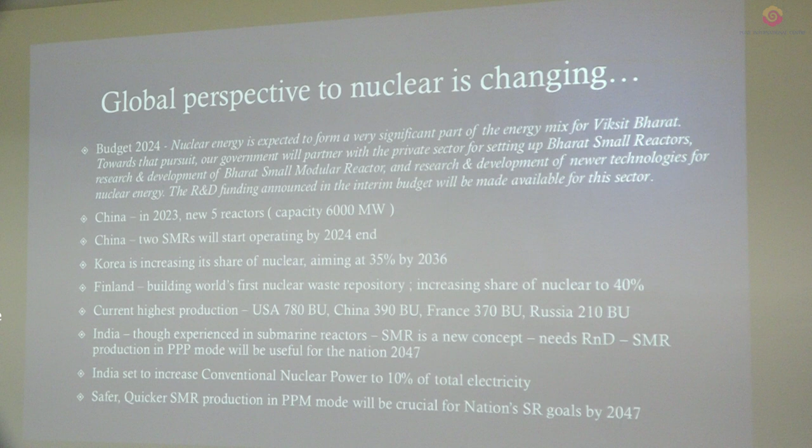We are set to increase our conventional nuclear power to about 10%. Today we are still only at about 3%, and that is the ongoing governmental program. But besides that, even that will not suffice to bridge the gap — and that is already committed.

Therefore, safer, quicker SMR production in PPP mode will be critical. Why PPP mode? Because now government has opened up and industry participation is welcome. That is the main game changer, and we are looking at the possibilities.

These are my initial remarks to make a case that we are trying to do this roundtable because we are a think tank who influence policies. So we want to go ahead of what's happening, if possible.

In fact, we are pleasantly surprised that many things are already happening. Hindu Business Line has reported that the government is already thinking of how to modify the nuclear regulatory regime laws to allow private players to come in with more enthusiasm, and how SMRs will change the picture.

So it is in this context that we are discussing here today, probably for the first time in Pune, at least in Maharashtra. I tried to get as many experts, as many well-known and well-informed people as possible. So we will commence the discussion with a few words from the chairman.

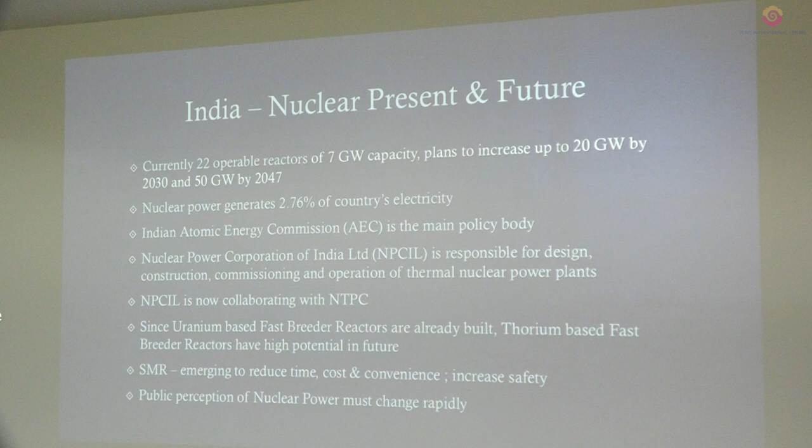India has almost achieved its three-stage nuclear program. The fast breeder reactors in the second stage are under testing. A few months ago, the Prime Minister himself started the operation of the uranium-fueled prototype fast breeder reactor. With fast breeder reactors, we have achieved closed-loop nuclear cycles, which ensure minimal radioactive waste is generated and most of the radioactive fuel is reused in the same loop.

People are always taken aback when they hear the word nuclear. All they imagine when they hear the word nuclear is the atomic bombs of Hiroshima, Nagasaki, and the nuclear disasters of Chernobyl and Fukushima. People are even wary of the word radiation. Now let's closely examine all these things.

Radiation from a nuclear power plant is ionizing radiation, which is harmful for the body because it has gamma radiation. What people don't know is that most of the ionizing radiation exists naturally. Atmospheric radiation, radiation from buildings, medical processes like CT scans expose us to equally harmful radiation. In fact, you won't believe it, but a flight from India to USA exposes us to more radiation than entering the nuclear power plant itself.

Now, talking about the nuclear disasters, Chernobyl was the worst nuclear disaster till date. One reactor blew up, a 30-kilometer exclusion zone was created, and more than 3 lakh people were evacuated. In 2005, that is 20 years after the accident, a United Nations committee of more than 100 scientists and representatives from IAEA, WHO, UNDP, FAO, UNEP was formed to study the impacts and deaths due to the Chernobyl disaster over a period of 20 years.

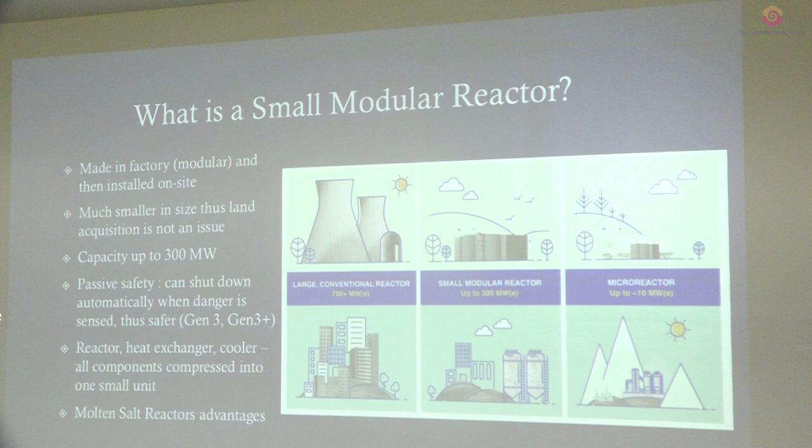So in case of an emergency, there is no force or push to drive the radioactive fuel out of the container. So there is no possibility of leakage or meltdown of the fuel. Such types of advanced nuclear reactors like SMRs and molten salt reactors are inherently safer.

Now coming back to SMRs, all the 80 SMRs are registered with the International Atomic Energy Agency, and the agency itself has published all the data, the designs, fuels, company manufacturing it, country owning it, capacity and everything in 2022 itself. Talking about the advantages and potentials of SMR, due to their small size, they're ideal for remote and difficult to access villages. They're ideal to deploy there. In the Himalayas and in remote military operations, they can produce electricity.

We all know that data is the currency of the future, and all these data processing centers will require huge amounts of energy. So SMRs are best suited for industries which require high amounts of energy. Nuclear power has the highest PLF, more than 80%. SMRs can also be installed more quickly than traditional nuclear power reactors.

One of the peculiar features is that no large cooling towers are required. No large quantity of water is required for cooling. SMRs can also be made in standardized designs so that it is cheaper to produce them at mass scale. An advantage of nuclear energy is that it requires the lowest material, beginning from the construction of the power plant, including the cement, concrete, glass, and the fuel, everything. And also, nuclear energy has the lowest greenhouse gas emissions per gigawatt hour of electricity produced.

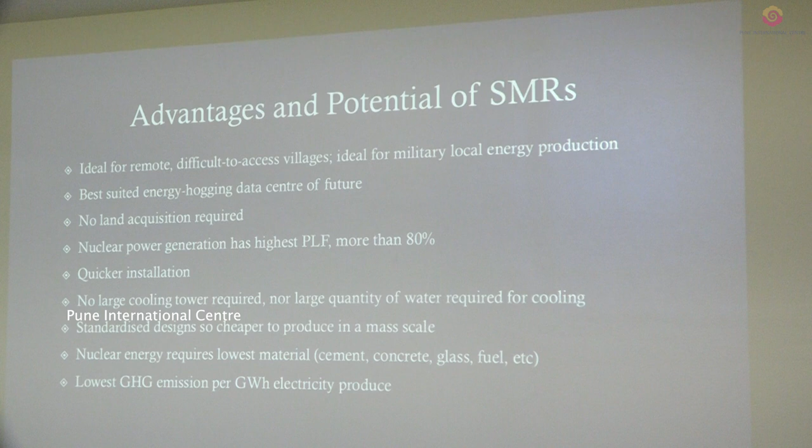NPCIL and IIM Ahmedabad prepared a report in April 2024, titled Synchronizing Energy Transitions Toward Possible Net Zero India, Affordable and Clean Energy for All. This report was published by the Office of the Principal Scientific Advisor to the Government of India, and the report studies different scenarios of energy mix that can provide affordable and clean energy for all citizens living in developed India. By developed India, they're assuming a human development index of 0.9. Our current human development index is 0.64.

For a future population of 1.5 billion, energy requirements would be a minimum of 20,000 terawatt hours for 0.9 HDI and a minimum of 14,000 terawatt hours for 0.8 HDI. So the report basically focuses on the energy mix, which includes newer technologies like low carbon hydrogen from fossil hydrocarbons with carbon capture, direct splitting of water to get green hydrogen, advanced photovoltaics, and advanced nuclear technologies such as SMR.

The most interesting finding from this report is that among all the net zero scenarios, the one which has 330 gigawatts of nuclear energy deployed has the lowest LCOE, that is levelized cost of electricity for the consumers, and its greenhouse gas emissions are the least. As sir already mentioned, Russia has gone live with SMR. Russia has a floating SMR near the Arctic which provides 70 megawatts of electricity to a remote village in the Arctic. China has also gone live with SMR. They have the world's first commercial SMR in the Linglong One.

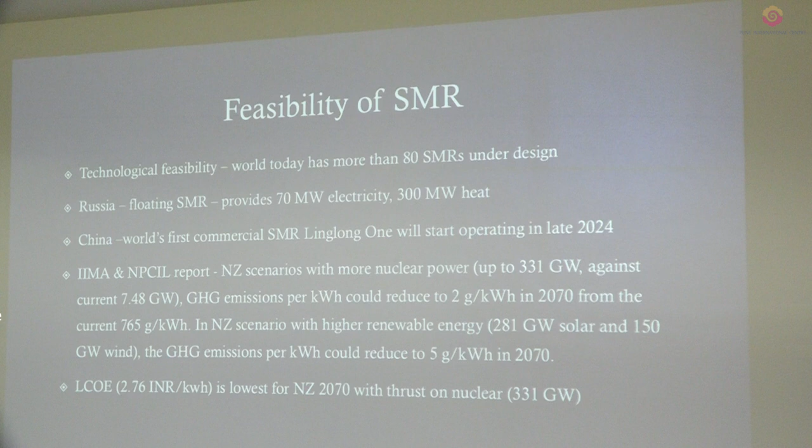The major advantage of SMR is that it need not be situated near coastal regions because it does not require a large amount of water. With SMR, we can go into distributed generation of electricity. SMRs can be deployed in different locations like remote villages in the Himalayas and military bases, and they will not only produce their own electricity, but will also reduce the dependency of such remote locations on large and centralized power plants. This increases energy self-reliance in smaller pockets and improves resilience against grid failures or natural disasters.

SMRs can be placed close to high energy demand centers like industries and hospitals. This way, we can reduce the need for long distance energy transmission, which in turn will reduce energy losses and improve overall efficiency. SMR can also provide high temperature process heat for industries like cement manufacturing, steel production, and petroleum refining. They can even power remote mining operations, especially in regions where extending the power grid is not feasible. We can reduce the need for diesel generators and hence cut down carbon emissions.

If we make SMRs or even smaller micro modular reactors portable, we can deploy them in disaster struck areas to provide emergency power so that critical infrastructure like hospitals and communication networks remain operational. Portable reactors can also be used for EV charging. By decentralizing nuclear power generation, countries can reduce their reliance on a few large power plants, and decentralization increases national energy security.

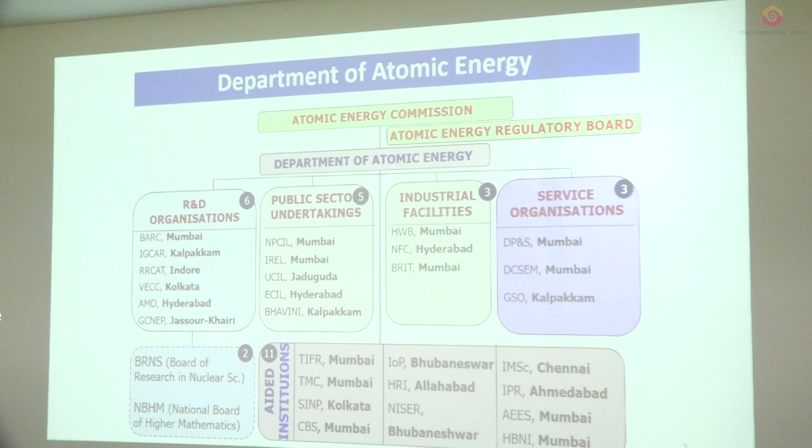There was a move to set up what is known as NSRA, Nuclear Safety Regulatory Authority, and it will play a very important role in AERB when we talk about the Bharat Small Reactors or the Bharat Small Modular Reactors, because licensing of these reactors will have to be done by AERB. Next one. This is basically the vision of the department and of NPCIL. Here you can see we talk about Department of Atomic Energy, NPCIL, which is the Nuclear Power Corporation of India. Bhavini is the one which is developing the prototype fast breeder reactor. I will touch upon that in the slide when I talk about the 3-stage nuclear power program. Then we also have Ashwini, which was set up in 23, and these are the joint ventures.

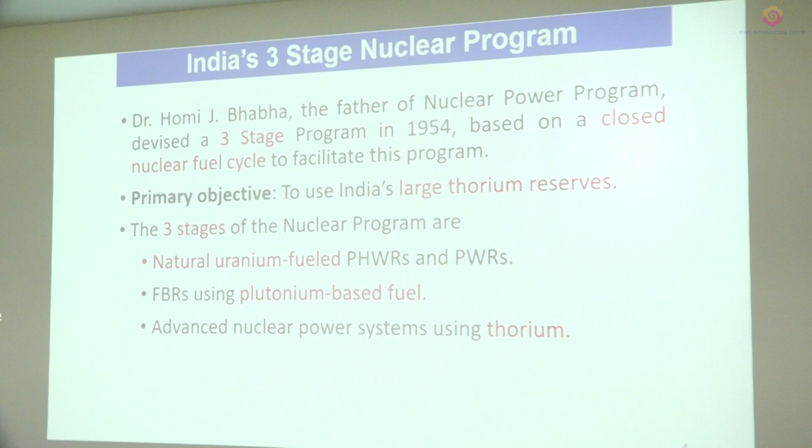Next one, please. So now this is our very famous India's 3-stage nuclear program, which was envisaged by Dr. Homi Bhabha, and the primary objective is to use India's large thorium reserves. See, India has a very peculiar situation that our natural uranium reserves are very, very low, but our thorium reserves, as Sayukta just mentioned, they are, I think, third largest in the world. So keeping in mind the need to utilize thorium for our energy production, Dr. Homi Bhabha planned a 3-stage nuclear program, which you will see in the next slide.

See now, basically what it does, you see the blue part, that is the first stage. This talks about the pressurized heavy water reactors. Basically, these are the type of reactors which use natural uranium. What you saw in the very first slide, both the reactors, Rajasthan Unit 1 and 2 and Rajasthan Unit 3 and 4. Natural uranium, it does not need any enrichment. What it needs is heavy water. So, in this, we use uranium, we use heavy water, and after irradiation, part of the uranium 238 gets converted into plutonium. Now this plutonium 239 itself is fissile. Now this is used as a driver fuel in the second stage, which you see in the middle.

Sayukta just mentioned about our Prime Minister visiting Kalpakkam facility somewhere in January. So I'll just explain what he had done and what subsequently has happened. See now, prototype fast breeder reactor, which is a 500 megawatt reactor, it has a core and the pumps and the heat exchangers within the vessel, and the vessel is submerged in liquid sodium. This is a very difficult technology. Now in January, what Prime Minister had done was the loading of the pressure vessel, not of the fuel. The fuel loading has started only very recently.

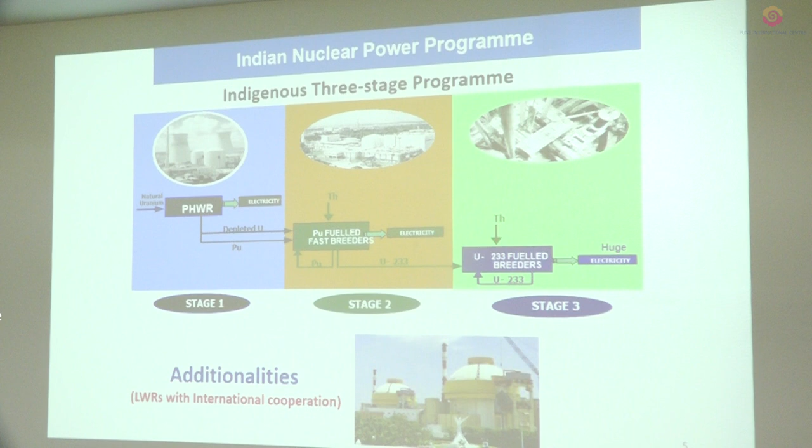The fuel is a mixed oxide of plutonium and uranium oxide, plutonium to the extent of 21% and 28%, and this fuel loading will take about a month. Why? Because these fuel assemblies are very heavy. They have to be loaded inside a pool which is submerged in liquid sodium. This is remotely done, and I believe, if I remember correctly, 192 sub-assemblies have to be loaded.

And in this particular case, we have what is known as the breeder material. Here in the first PFBR, the breeder is depleted uranium. Now this depleted uranium will turn into plutonium.

So sorry, so what about thorium? See, today we are not putting thorium in this reactor. To begin with, we are putting depleted uranium to generate more plutonium. We call it a fast breeder, a prototype fast breeder reactor. So what we are breeding, we are breeding plutonium from uranium.

But in the subsequent PFBRs, we will replace this blanket, which is depleted uranium dioxide, with thoria, that is thorium oxide. That thorium oxide will convert into uranium-233. This uranium-233 is again fissile, and it will then go into the third stage.

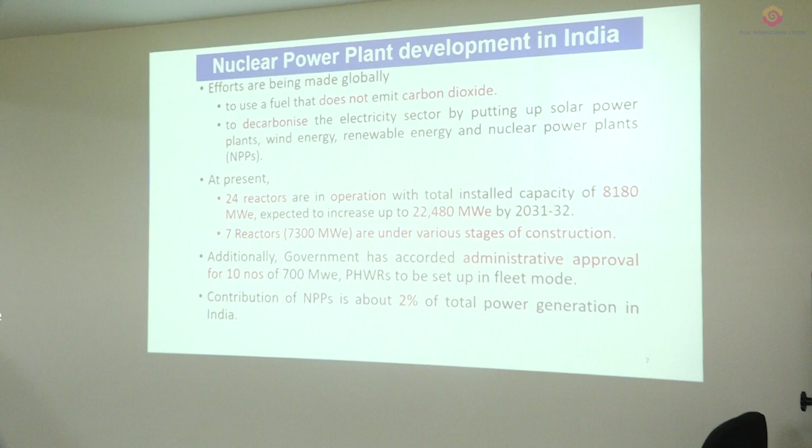Come to think about solar. If we have a monsoon or you have a cloud cover, or in European countries, when the sun is not shining for a good part of the day, you don't generate electricity, and definitely you don't generate electricity at night. So at those times at night, there is a demand, but there is no supply. So this is where nuclear comes in, because it has a very steady base load factor.

In fact, there is a very interesting case about Germany. Germany decided that it will close down all its nuclear power plants, and slowly it did that, and then it thought that it will depend on wind and solar. Over a period of time, they found that during the off-load, like at night, and when the wind is not blowing, they needed electricity. Now they had to import this electricity from France, which is generated by nuclear.

So much so that though they are not thinking about restarting nuclear, the price of electricity has gone up because they could not manage the base load factors. So this was a curious case of two cases, in fact. One is Germany and another one is Japan. Japan, unfortunately, after the Fukushima incident, shut down roughly about 52 reactors, all the 52 reactors, because naturally there was a lot of protest.

But then you see the requirement of Japan is met only by petroleum. If you sometimes watch satellite images, or even if you travel by air, as you approach Tokyo you can see the oil tankers. So basically the whole country, though this is an advanced country, is dependent on oil. But then slowly they also thought that they have to go back to nuclear, and now they have restarted their nuclear power plants. Okay, then at present we have 24 reactors in operation with a total installed capacity of 8180 megawatts.

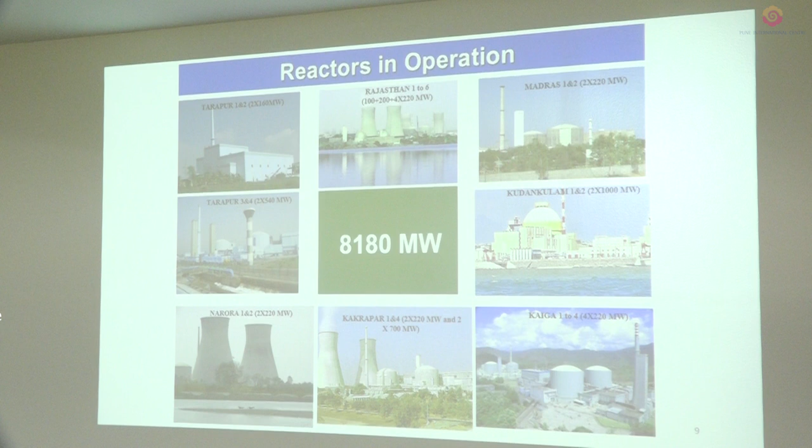These are some of the pictures. On the extreme top left is the Tarapur Atomic Power Station. I must tell you something very interesting about this. This vintage is actually that of the Fukushima reactor which blew up. That reactor and this reactor are of the same vintage, same time, right sir? And this reactor is still operational. Right now it is going through some changes, and I think it generates the cheapest electricity in the country, less than 1 rupee per unit, of that order. And of course you see other units, some are coastal sites, some are inland sites.

Now, projects under construction: we have pressurized heavy water reactors 7 and 8 at Rawat Bhata. After the Kakrapar unit, we have Rajasthan RAPP 7 and 8. We already have reactors 1, 2, 3, 4, 5, 6, all 220 megawatt. Now we are building 7 and 8 at Rawat Bhata, they will go critical very soon. Then we have GHAVP at Haryana, light water reactors at Kudankulam, 2 units, 3 and 4, 5 and 6. Now interestingly, the fast breeder reactor, which I just told you is a second stage reactor, for which now the fuel loading is going on.

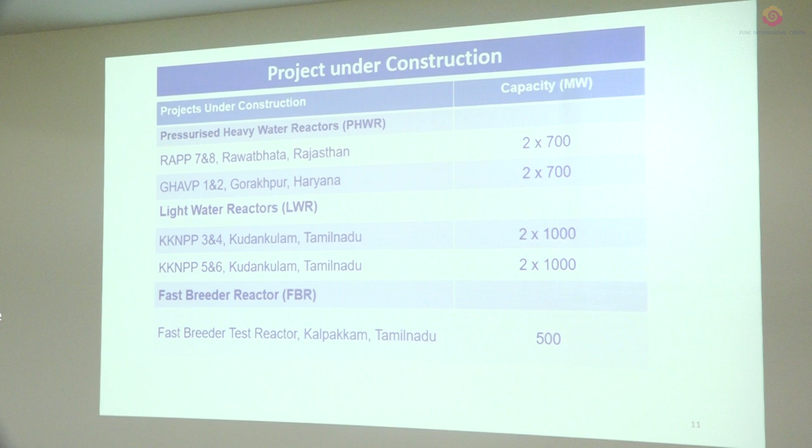That is when the whole discussion should come. When we talk about it, we will talk about that. Though today's roundtable is on SMRs, the good part is I am covering the conventional, so that you see where we have been, what capacity we have, and what we are looking into for the future.

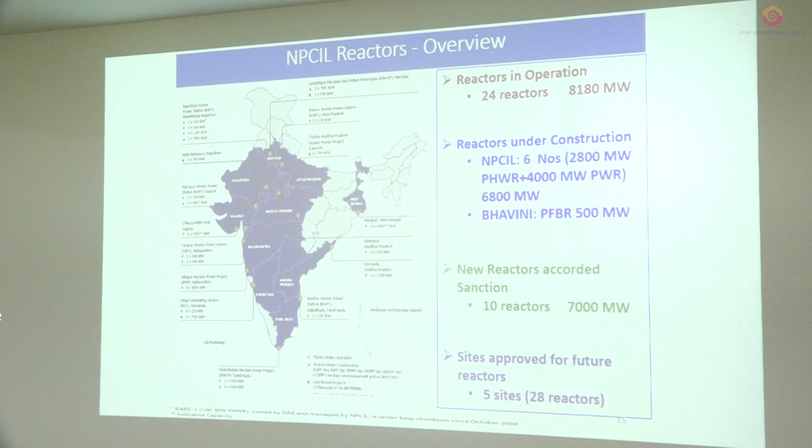Conventional things, I will come to that very briefly because she also spoke about it. I will just come to that.

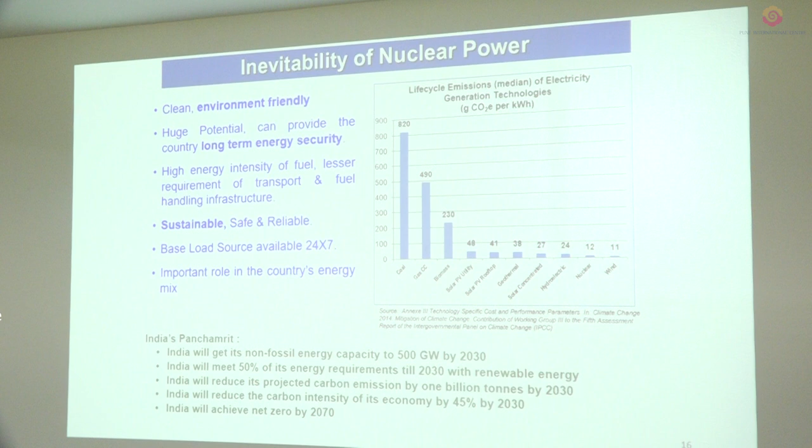Now, can you blow up this part, to the right? So this is important, this is where we talk about the carbon footprint. It is only larger than wind. These are the figures, I think very basic. Anybody would like to ask why there is a carbon footprint for something like a solar plant or for a nuclear plant, and where does it come from, and where does it come from for wind? When you produce steel or material, you generate carbon dioxide, whether it is the steel making process or something. So these figures are for production as well as the lifetime operation of these plants. So this is where nuclear scores over most of the renewables and the conventional.

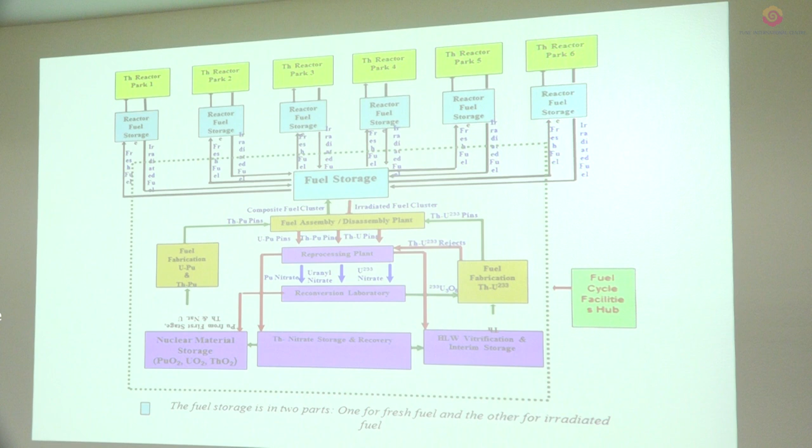Now, when you have so many reactors, you will have to store the fuel. I'll come to that slide where you see the fuel. Go to the next slide. The concern is one - I told you about the regulatory concern. As of today, the Atomic Energy Regulatory Board is working on it, but they still do not have a document, because there are siting requirements, operational requirements, licensing requirements for new kinds of reactors, imported reactors. So they are working on it. They will take time, they will have to work. In fact, they have to start work right away.

Second is the nuclear material. If you want an explanation of nuclear material, I have slides - I will come to that. Nuclear material, safety, security - in fact, safeguards also should come. Safeguards is nothing but non-proliferation. Due to severe external events, and the security and safety during transportation of both fresh fuel and spent fuel in the public domain. Next one.

India follows what is known as the closed fuel cycle. Basically what happens is the fuel that comes out of the reactor is rich in plutonium. We reprocess it, separate the plutonium, and use it like in the prototype fast breeder reactor. This is called a closed fuel cycle. France and Russia also follow this, but the US follows what is known as a once-through nuclear fuel cycle. They don't reprocess, saying that irradiated fuel is a security hazard. So we follow the closed cycle.

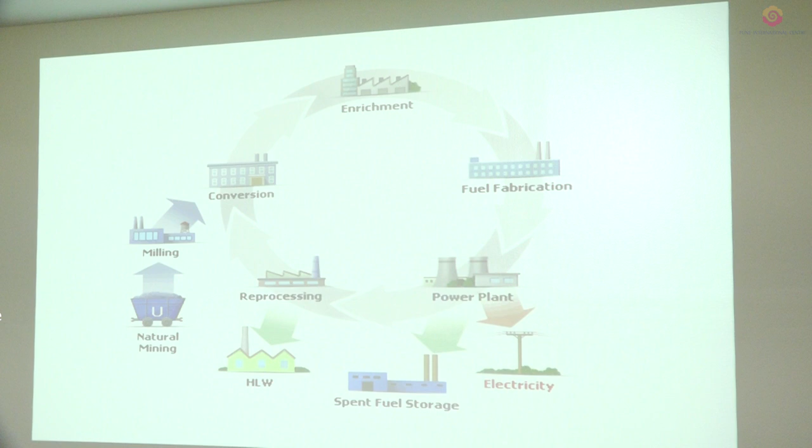Now let me tell you about fissile material. Nuclear material is basically uranium-235, uranium-233, and plutonium-239. These three nuclides undergo fission and can be used to make a nuclear device. The difference between nuclear material and radioactive material is that radioactive material like cobalt-60, used for industrial or medical radiography, does not undergo nuclear fission. You cannot make a nuclear device out of those. So when I talked about nuclear material safety, these are the three nuclear materials. I will not go into the details of how they are generated.

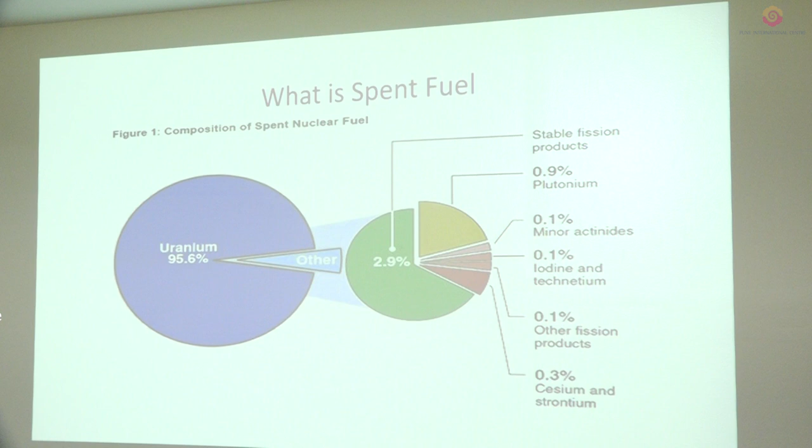I will skip this one, which talks about spent fuel. Now this is just to tell you about how safeguards are implemented worldwide. This shows the development of a nuclear weapon. The IAEA safeguards I talked about concentrate on the nuclear material shown here.

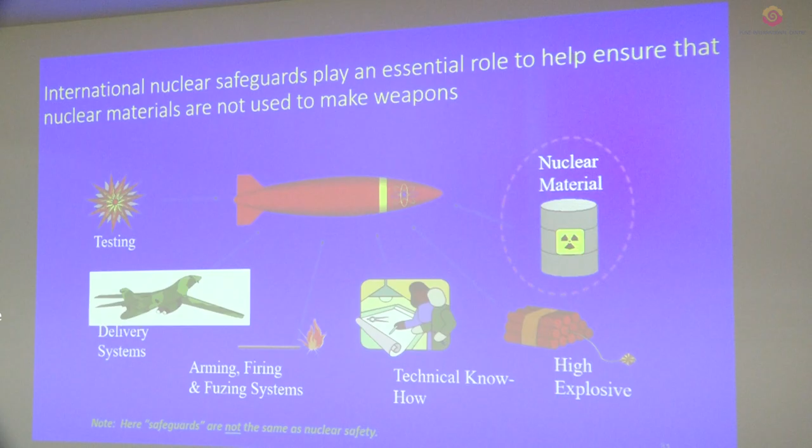Now what are the safeguards methods? These are verification methods used by the International Atomic Energy Agency. One is known as NUMAC, nuclear material accounting - you have to submit monthly reports of your inventory. When there is plutonium, in all SMRs once you irradiate uranium, some part gets converted into plutonium. The least count for reporting to IAEA for plutonium is 1 gram - even 1 gram here and there you have to account for. In case of uranium, it is 1 kilogram. So monthly reports have to be submitted.

Verification happens during periodic visits - this is another challenge. Let me give you an example of a reactor under IAEA safeguards in India, the Tarapur Atomic Power Station. IAEA inspectors, in a pair, visit that reactor I think once a month. They come all the way from Vienna and are posted there for about 2 to 3 days. They do the nuclear material accounting, some measurements, using some equipment that is there.

Now, why I am saying that this increases: suppose when we opened up the Indo-US nuclear deal, one of the requests from the IAEA was that there will be more inspectors to visit because you have so many more facilities. So the load on the IAEA inspectorate, and I think young people can listen to this statement. The load on the IAEA inspectorate, with SMRs coming up not only in India but worldwide, the demand for professionals in nuclear safeguards and nuclear security will rise manyfold.

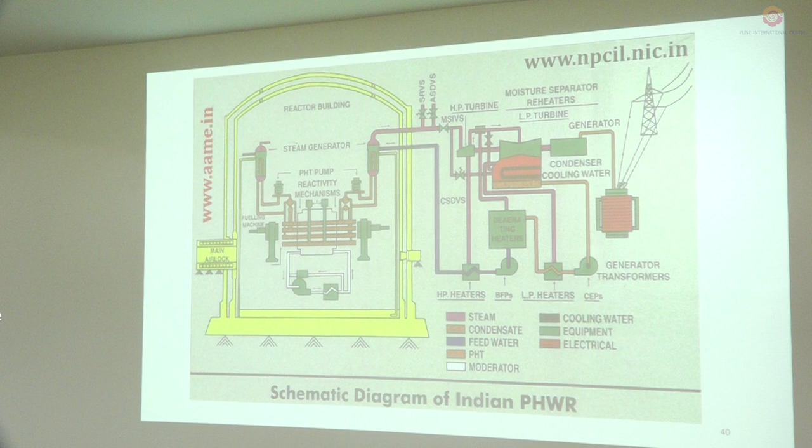So this concept is the Bharat small reactor, 220 megawatt, which the department is now making, and the Bharat small modular reactor most likely will not be a horizontal reactor. It will be something like a vertical pressurized water reactor, but the difference is all the reactor parts will be modular, which can be transported to site. The Bharat small reactor is not modular.

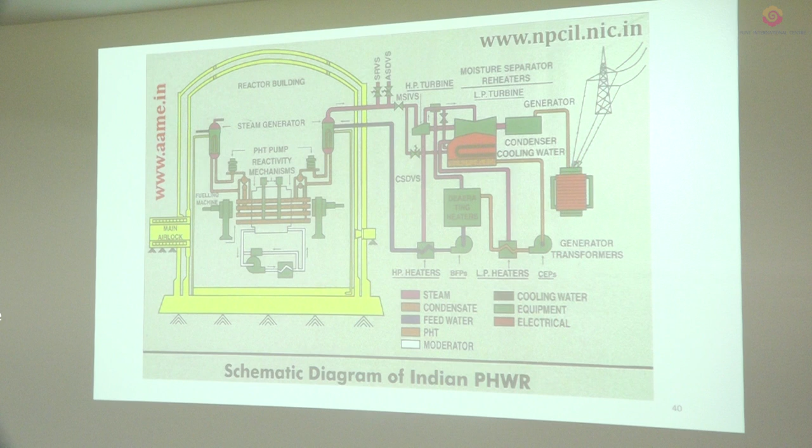Thank you. I'm sorry I've taken longer than I should have. No, thank you very much. But I'm sure Mr. Kotwal can throw some light on how it can be done.

No, I am not a person who will tell you some things which are not possible. Whatever is possible, I'll say. No, it's not possible today. Having said that, but one second, please. It's not possible today as per the standard operating procedure. I understand. But CIIC should be able to tell us how it can be made possible. Yeah, I'll come to that.

Okay, thank you, Dr. Suresh. Actually, your first slide gave me memories of my first job in L&T. 1968 I joined, and my first job was in the nuclear field, RAPP 1 and 2. And RAPP 2, everything including site assembly and all, I have myself done. And after that, every single reactor I have been involved in, the reactor or the reactor equipment. So to that extent, I have a little knowledge about reactors and PHWRs and so on.

Then of course it went to PFBR, that's the fast breeder reactor, which also we participated in and manufactured it. And later on I was involved in ITER, the fusion reactor. So I have got this general background, that's a fortunate thing. Now, because you have covered it in such great detail, I don't want to go into technologies of SMRs, except to say that SMRs are basically in categories. One is land-based, another is marine-based, which unfortunately we mix one to the other.